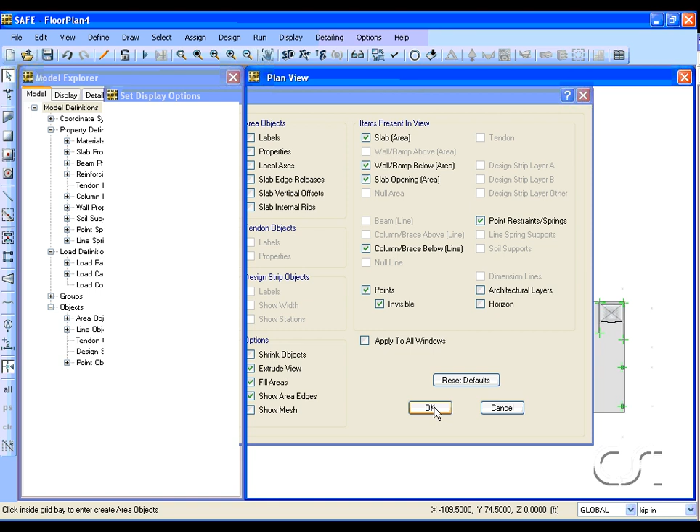Now we will slow it down a bit and explain exactly what was done. The first step is to import an architectural CAD plan.

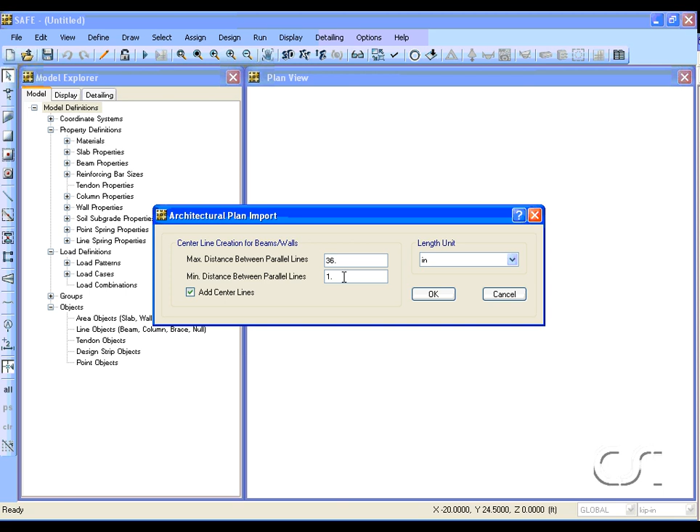Once we select a plan, SAFE will ask if we want to add center lines to place walls and beams. We will leave the default settings, which means that SAFE will place a center line between parallel lines that are spaced from 1 inch to 36 inches apart. The architectural plan is now displayed.

When working with an architectural plan, one of the key commands is Architectural Plan Options. This allows us to selectively set which items are to be displayed, and hence which items will be converted into SAFE objects. We will start by selecting Columns Only.

Before we draw any columns, we will check our default column property definition. Column 1 is 24 by 12 inches.

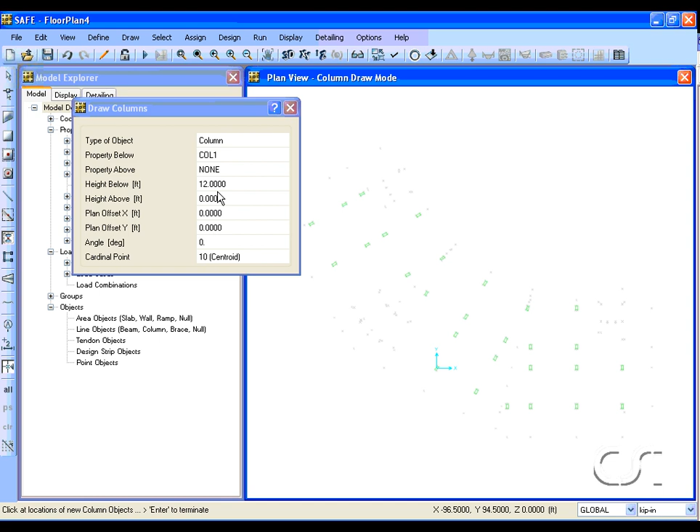Select the Draw Columns command and move the form out of the way. Next, hold down the Shift key and window around some of the architectural columns. Column objects are added that fill the polylines shown in the CAD drawings.

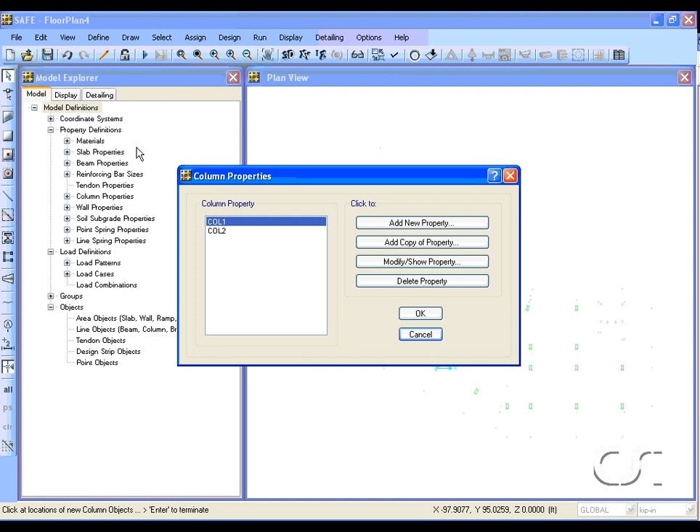These columns are a different size than our default column. Checking the column property definition, Column 2 has automatically been created with dimensions that match the architectural drawings.

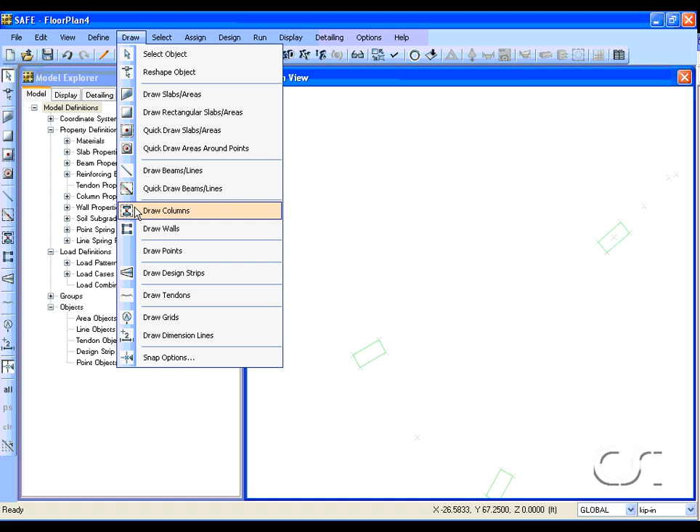If we zoom in, we can add a single column. Return to the column draw mode, and then place the cursor on the column edge, and when it says Arch Area, click the right button. Select the Convert SAFE Column option, and this will convert the polyline area into a SAFE column.

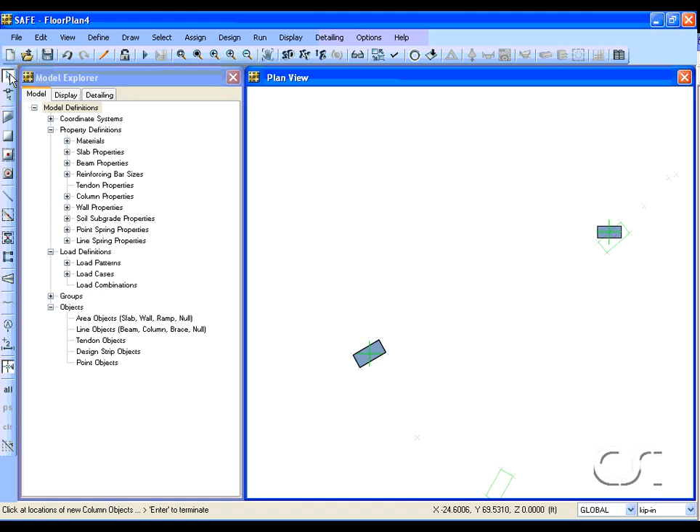If we had used the left mouse button instead of the right, a column with the properties shown in the Draw Columns form would have been placed. Delete this last column and return to the draw mode, and use the Shift key plus window to create all of the remaining column objects.

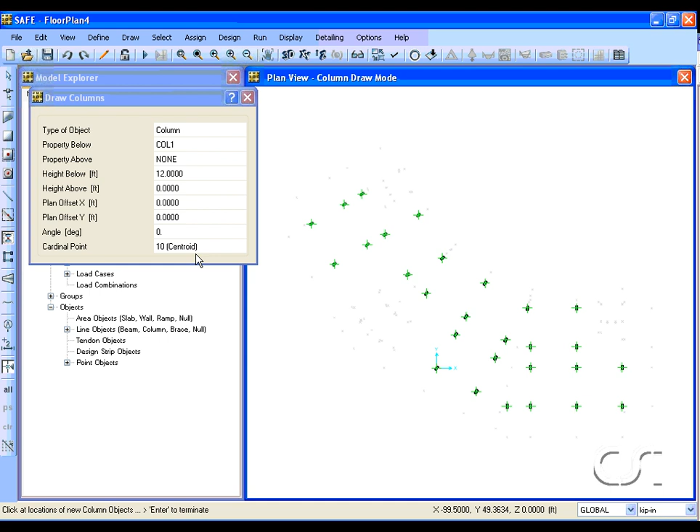Next, we will change architectural layers to display walls. Checking the wall properties, we have a single wall property defined.

Similar to what was done with the columns, hold down the Shift key and window around the wall polylines. SAFE converts these polylines to wall objects. A check of the property definition shows that new wall properties have been created.

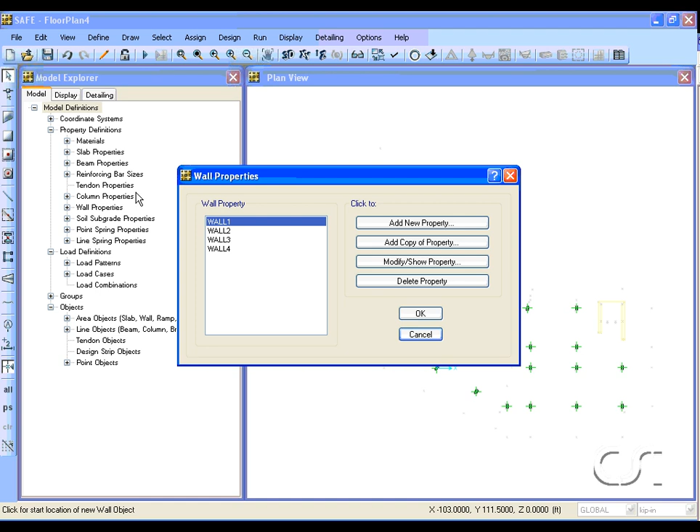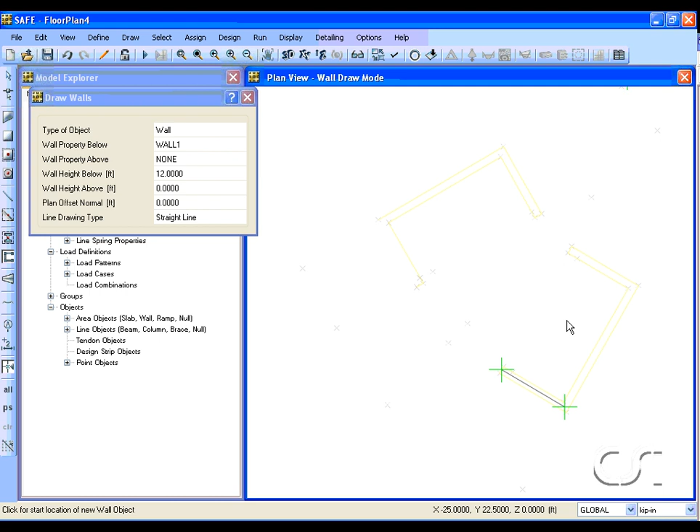Zoom in, return to the draw mode, and this time when the center line is displayed, right-click, select Convert to SAFE Wall, and we can add one wall at a time.

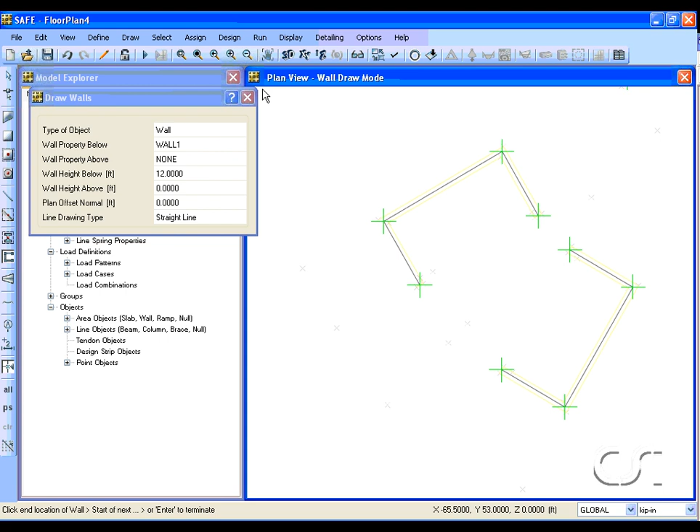Sometimes, if multiple lines exist at the same location, the program cannot locate the center line, so we need to draw this wall in the traditional manner. This wall will use the property in the Draw Walls form. Finish walls by windowing with the Shift key.

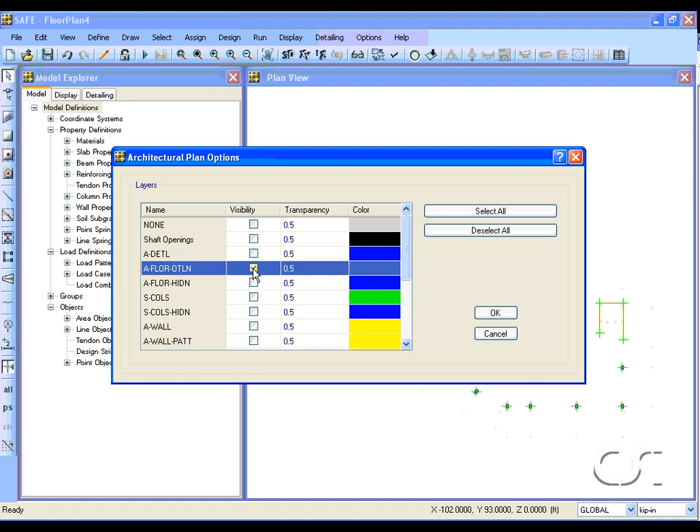Next, change the architectural layer to the slab outline. Select the Draw Slab command and right-click on the edge when it says Arch Area. Select the Add SAFE Area option and the polyline is converted into a SAFE slab object.

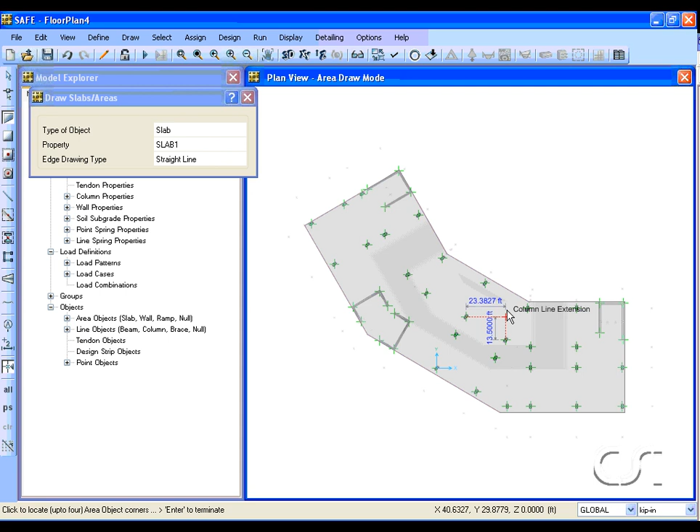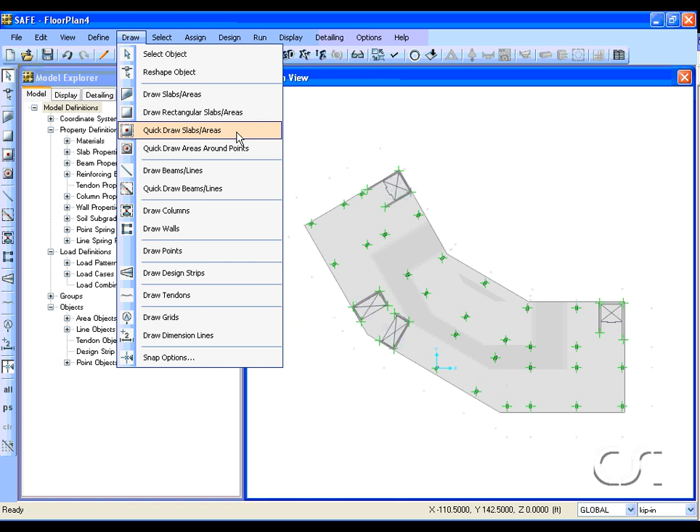Change the items visible to be the shaft openings. Select the Quick Draw Slab Areas command and set the type of object to Opening and set Draw Object Using to Arch Layer. This must be set to Architectural Layer for the program to convert the polylines to openings.

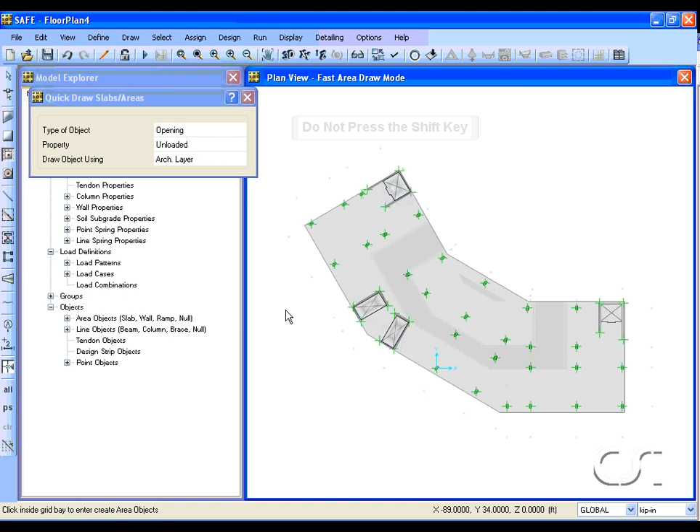Window around the openings. The Shift key does not need to be pressed for this command. Leave the draw mode and zoom in around the last opening.

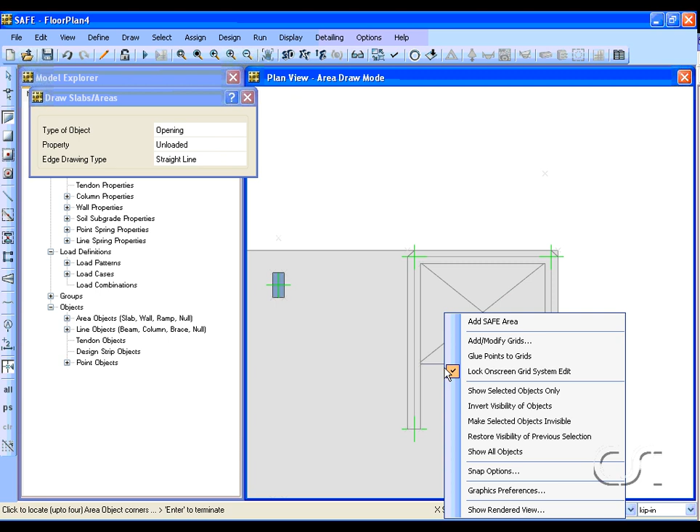This time, select the Draw Slab command. Make sure the type of object is set to Opening, and move the cursor to the edge of the opening. When Arch. Area is displayed, right-click and select Add SAFE Area command to convert the polyline to an opening. Leave the draw mode.

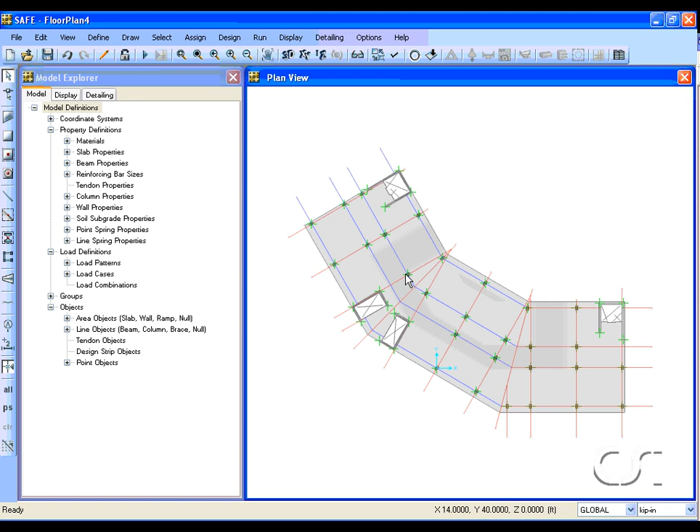Lastly, we will add grid lines. Switch the visible layers to A Detail and S Grid, which are the architectural grids. Select the Draw Grids command and hold down the Shift key and window around the entire model.

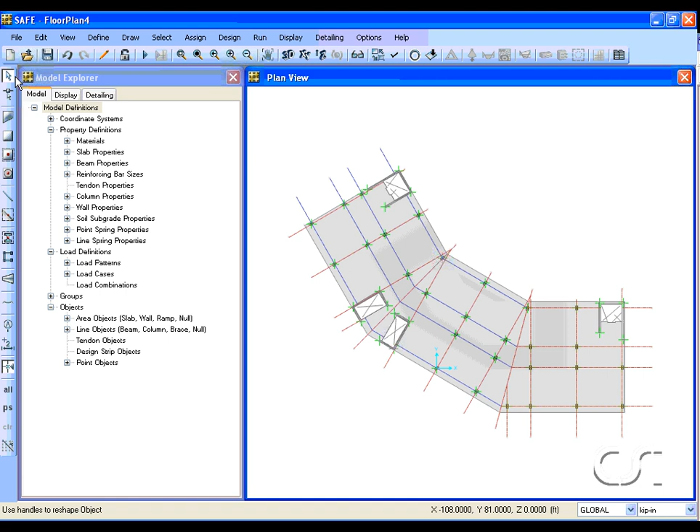Leave the draw mode and go to the Set Display Options form and switch off the Architectural Layers option. The SAFE grids are now displayed.

If we go to the Define Coordinate Systems command, we see that the architectural grid system has been imported by SAFE.